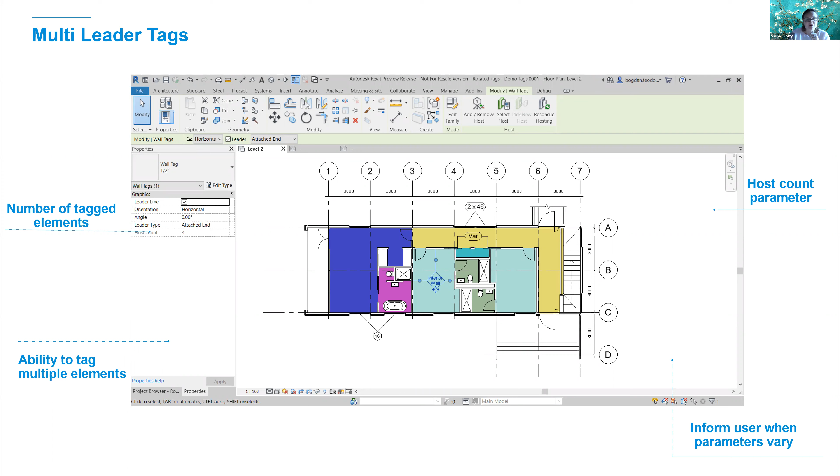But the big deal in terms of the API is that Independent Tag has had a lot of its methods and properties replaced to update for multiple references as opposed to just one. So traditional tags will still only have one reference, but that will just be the first reference in an array as opposed to an individual piece.

So a lot of different methods have actually changed here. And there's a couple of new methods associated with being able to add and remove references, as well as identify whether a tag actually has multiple leaders or is a single leader tag like traditional tags have been.

Revision APIs. We've done quite a bit of work on revisions this year, and we'll come back to that a little bit later. For the purposes of changes, we've actually changed the terminology in the Revit UI, so that's reflected in the API as well. You can start to see we're changing settings to numbering sequences because we've introduced this concept of sequences. We'll talk about that later, but if you're using these methods, you'll probably want to update them.

Import and export API changes. Views are now optional for imports and links. That's not entirely true for every single class—I believe DGN is an exception where that will still require a view, but a lot of others do not. So you don't have to provide an explicit view if you're creating an import or a link.

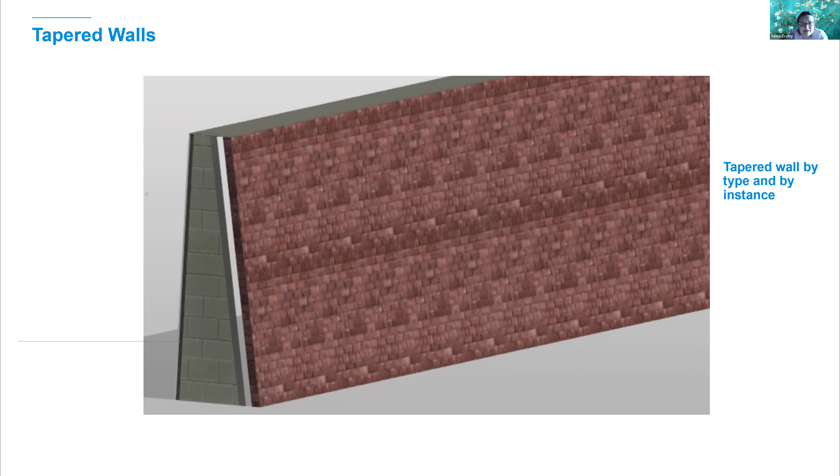In other modeling enhancements, we've focused on tapered walls. We did slanted walls last year, and we heard that the next most important thing was tapered walls, so we've added that capability. You can create these using the regular wall tool, and you can assign a specific layer to have variable thickness.

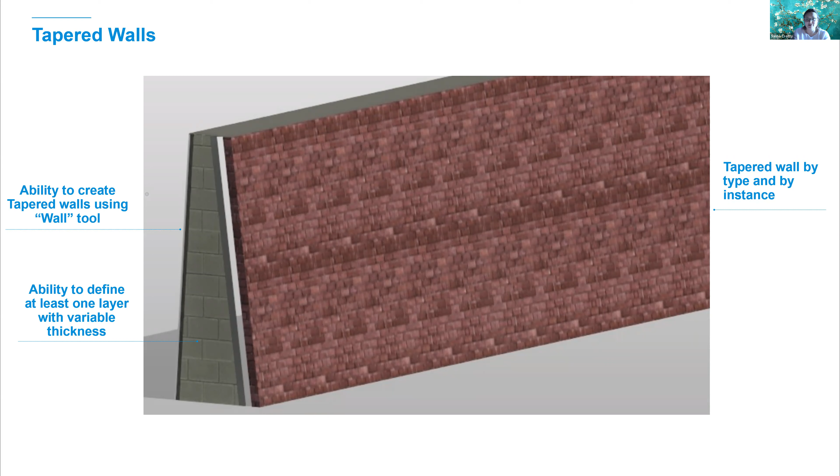There are associated APIs with this change, but not necessarily limited to this. We've now allowed you to provide a profile sketch in general—not applicable to tapered walls as much, but for slanted and tapered walls you can now get a cross section and identify whether it's valid. We have a number of new enumerations associated with the functionality for tapered walls to understand how things are measured and to define that cross section.

One other change to walls is for compound structures. We've added a new method that can identify whether the compound structure can be used to split or merge regions, and a new validator associated with merging or splitting regions in a wall.

Probably one of the biggest gaps in the Revit API has historically been the ability to modify sketched elements—anything with a sketch, including walls, openings, ceilings, and floors. I'm very happy to say we've now introduced this functionality for those elements.

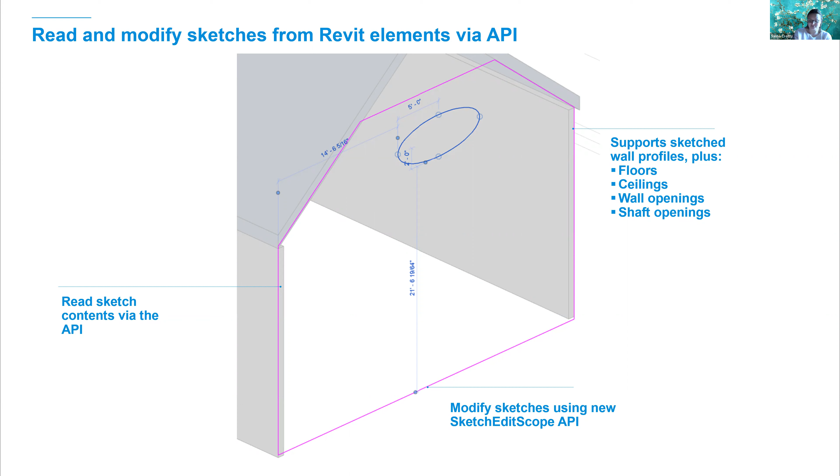New things include the ability to get a sketch ID from the object you're interested in—ceiling, floor, wall, or opening. Given a sketch, you can find out what its owning element is and go back to that owner. Sketch now has a method called getAllElements, which returns everything that is part of that sketch, such as model lines, dimensions, or reference planes.

The way you edit a sketch is by creating a sketch edit scope. When you're inside that scope, you can add, delete, or modify elements that are inside that sketch.

It's only supported at this point for those four different types of elements. You start the scope, and while inside it you can only edit things inside the sketch—you cannot edit anything outside it. When you complete the scope, you can then edit things outside the sketch, and completing the scope updates the sketched element.

You can check whether an element supports sketch editing—we've got a convenient method to answer that question. We've also got a validation method for ceilings and floors, since these can be quite complicated, especially with multiple loops, which is why we have this validation method.

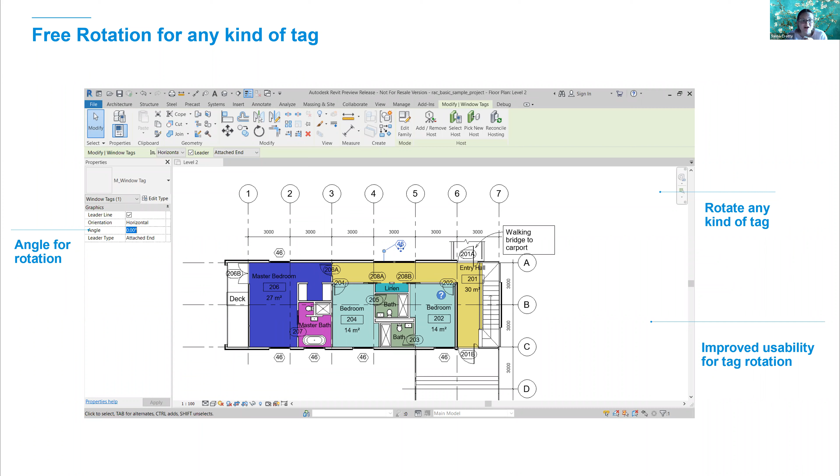Another enhancement we've made to the UI is the ability to freely rotate any tag. Previously this was something you had to do as a parameter - you had to finagle around with it, build custom families to do it. Pretty painful. Now we've made it really easy, and the API for this is also really easy. We have one new property called rotation angle that allows you to rotate a tag. Nice and easy - I love it when the API is just that simple.

Another huge request - the #1 rated Revit idea for the API - was the ability to do color fills and provide access to those. So that's absolutely something we did. We wanted to make sure you're able to create API options, create color schemes, and place legends, with an associated API for all of that. Another big benefit: as we were doing this, we changed the default colors in the color scheme, so Revit should look a little bit prettier out of the box in the future.

In terms of the APIs associated with this, I didn't cover every single method or property, but I wanted to give a high level summary of the classes. We've got a color fill scheme class and a color fill scheme entry class that parallel capabilities in the UI. We've also got additions to view to get and set the color fill scheme ID, so you can control the behavior of the view. And we've got a new color fill legend class which allows you to place and control legends. Hopefully this is a reasonably complete API - we've been gathering feedback for almost a year here, so hopefully we didn't miss anything, but if we did, just let us know.

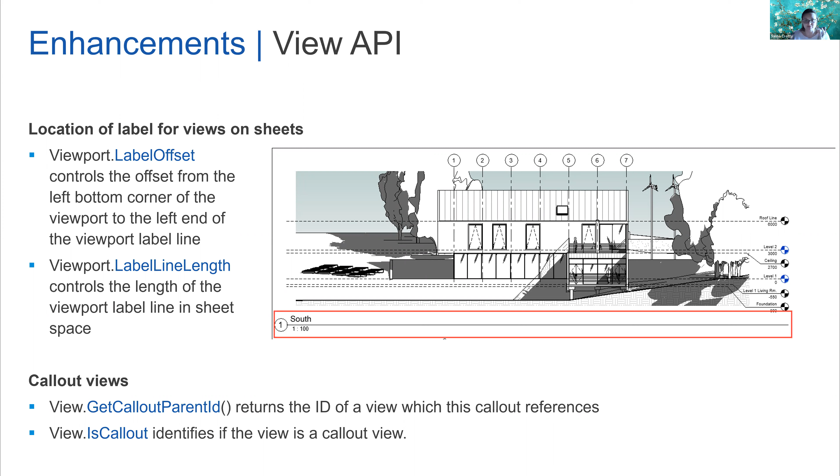And for callout views, you can actually ask it for its parent ID and it'll tell you what its original view is, building out that relationship between views.

Other enhancements to views in general include the ability to create or view grids in 3D. There's a lot of capability in terms of what this can do in the UI, but this is kind of an extension - we did levels in 3D, now we're doing grids in 3D, because we really want to encourage people to work more in 3D if we can.

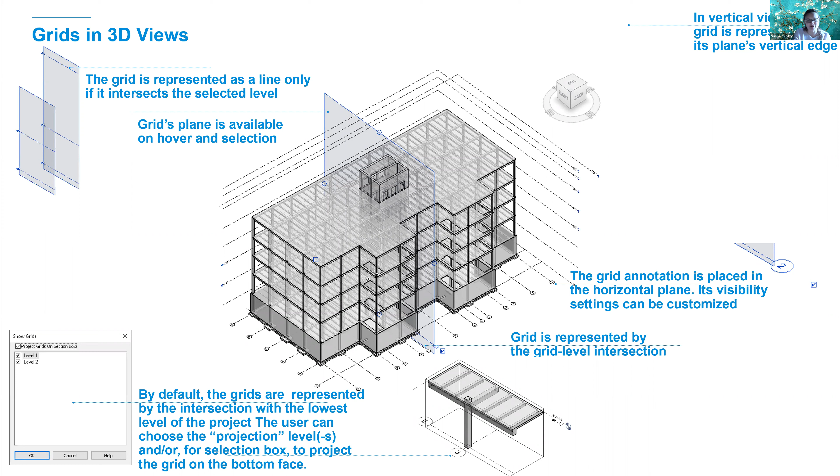As far as APIs go, not a huge amount, but you can start to control visibility at the view level. You can hide them, identify which levels actually show grids, and there's a bunch of utility APIs to control visibility and access.

Another cool API feature is temporary graphics and controls. The controls part is really interesting because this allows you to create in-canvas controls that a user can click on and take an action. This is a really powerful tool, and I'm really happy we're able to expose the API, because there was really no good way to do this previously in Revit, other than trying to create weird 3D geometries. Now it's a little bit simpler.

So we kind of have this temporary graphics manager that allows the creation of these things. In-canvas control data stores a reference to the image. And the temporary graphics manager has the ability to add a control, update the control, and remove the control.

Oops, I skipped a slide. Sorry.

Multiple values: we've heard from customers that when you select multiple objects with different values for the same parameter, it always displayed blank in the Revit UI. There's no text, and no way to tell if there's no value or if it's just not shown. We now have the ability to define what you want that representation to be, so it can show 'varies' or whatever is desired in your model. You can set this at the model level, but also customize it for schedules, so individual properties in a schedule can override and have different behavior.

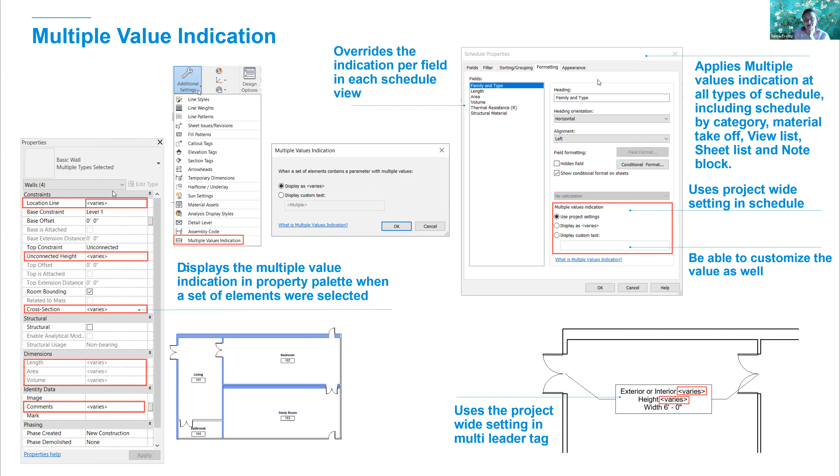These are the associated APIs. There's a generic class called Multiple Values Indication Settings that allows you to define the generic behavior between properties palette, tags, and schedules. For schedules, you have the ability to customize that display type, defining whether you want a project-based definition, custom text, or something specific to an individual property.

Dimensions: we now have more information and more access to a dimension. You have the ability to control text position, leader end position, leaders and elbows. You also have the ability to control prefix and suffix. We've made the dimension API more flexible, including some capabilities we improved in the UI while we were at it.

There are also new additions to the API for shared coordinates. We have Reset Shared Coordinates, and you can now identify whether a base point or survey point has been clipped or not. Reset Shared Coordinates is consistent with the UI functionality. If you want to learn more, take a look at what Reset Coordinates does, because it does quite a few things at the same time.

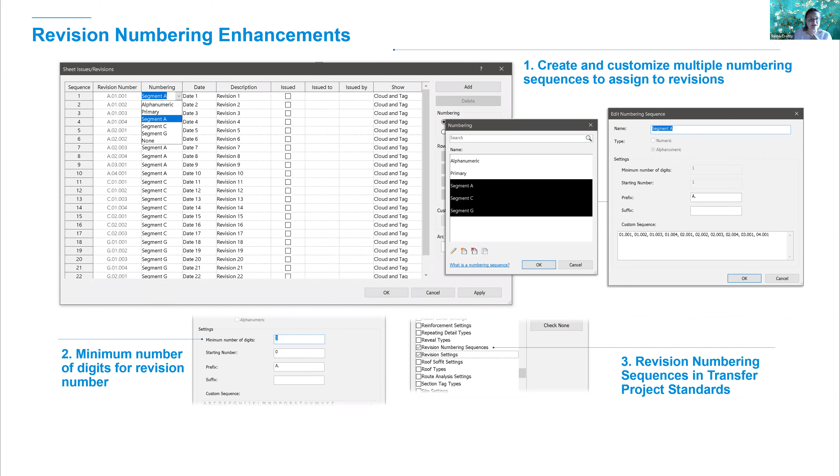Revisions: we did a bunch of work here. We introduced revision sequences, which allows a lot more flexibility with revisions and also conformance with ISO 19650 standards. Beyond the sequences themselves, we've been able to define a minimum number of digits, since a lot of ISO standards require something like a letter followed by 001 for the first one. You can now accomplish that with revisions, making them a lot more flexible.

There's an associated API for this as well. We have equivalent API capabilities: revision numbering sequences to define what the sequences are, the ability to set a given revision's sequence ID, and access to minimum digits, as I mentioned earlier.

Miscellaneous APIs: utility methods for levels to get the closest level to a specific elevation. Phasing API improvements make sure you can't set phases that don't make sense for a given element. And geometry APIs for meshes let you identify whether a mesh is closed or not.

We also have a point cloud API now. While this is really only one method as far as Revit goes, it provides access to the Recap SDK. For Recap point clouds in Revit, you can get a lot more information out of those by using the Recap SDK. That does require the recap wrapper.dll to work with it, but once you do, you have access to a lot more point cloud capability than you're able to get directly with the Revit API.

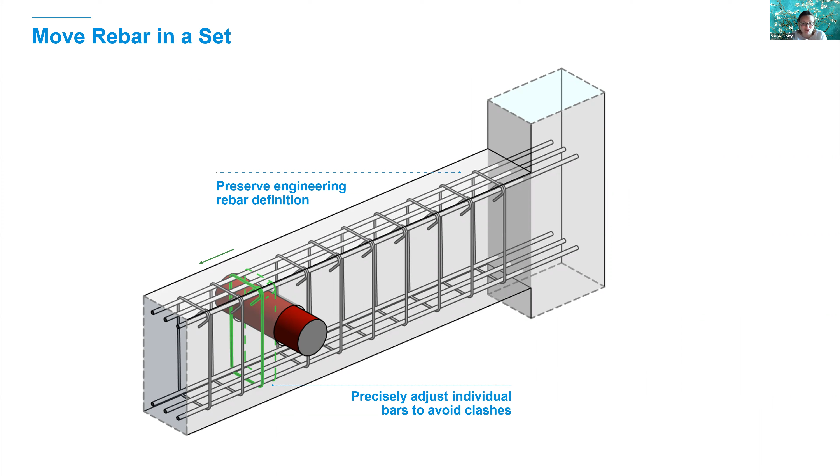Moving rebar in a set. A lot of the time there is a need, due to clashes or conflicts, to move one rebar in a set. We've actually made that much easier, so you can go ahead and do that. There are also equivalent APIs. So you start to see with all these in the rebar set, you can understand how to move a bar, and you have associated methods to allow you to do that.

You can also remove individual bars from a rebar set, so if you need to skip one, you can go ahead and do that. And you can also do the same thing for path reinforcement, modifying the position of an individual bar. It does not work in the other types, I don't believe it works in area reinforcement or whatever the other one is that I can't think of off the top of my head.

More information about reinforcement, so there's now kind of access to these reinforcement layers. Quite a number of methods that provide information about the layers and control for how those layers behave.

We now have the ability to convert a rebar system into individual bars. So if you essentially want to explode it, we now have the capability to do that through the API.

You can also get the center lines for rebar, and I think this new method gives you the center lines in the transformed location. Previously you had to post-apply a transform. This makes it much easier because it gives it in the actual location of the rebar in the project.